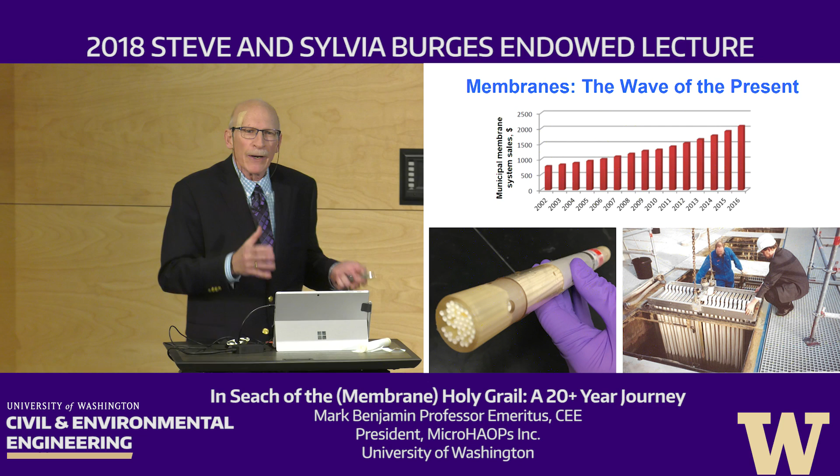The dirty water is put on the inside, and the membrane takes the contaminants away as the water is pushed through the walls of the straws. The problem is that the contaminants which you want to remove, and which the membranes do a very good job of removing, clog up the holes in the straws. So the very job of doing what the membranes are supposed to do causes them to fail. That failure is called membrane fouling.

This is water we've used for many years in our testing, from a local lake that's fairly severely impacted. It's dirtier water than most drinking water supplies would be. We used it so we could do our experiments faster, to be frank about it. But the general kinds of contaminants in this water, primarily stuff called natural organic matter, is the major foulant of drinking water membranes.

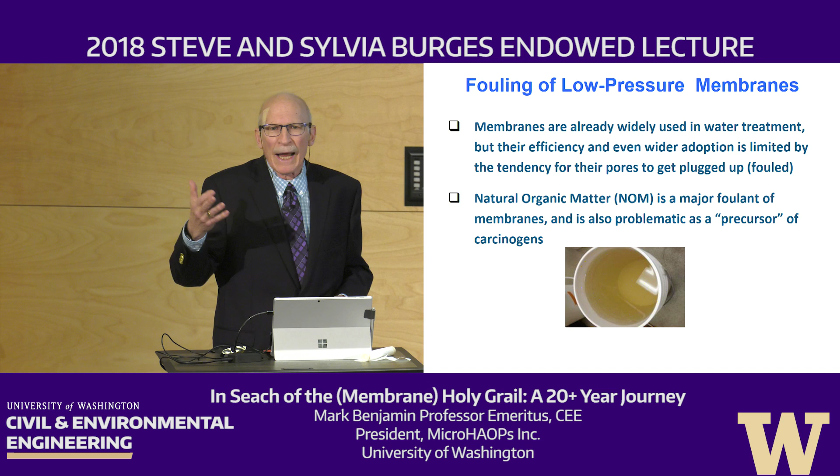Membranes are already widely used in water treatment, but their efficiency and even wider application is being limited by fouling, and natural organic matter is a major foulant. Not only is it a major foulant, but natural organic matter also reacts in traditional water treatment plants to form chloroform and other carcinogenic compounds. So you want to get the organic matter out of the water, and membranes do an okay job of that, at least some do, but you want to do it without causing the membranes to get fouled.

Here are the membranes we actually used in our testing, at least what we started with. We use much smaller, open membranes for two reasons: one, so we don't have to truck tons of water into the lab, and second, so we can see what happens. This white circle is a membrane in a cartridge. We push water through from top to bottom. The membrane collects the contaminants and also gets fouled, and we measure that fouling, which I'll show you later.

This is a different kind of membrane, one that's sold to the military and to outdoor enthusiasts taking trips into the outback. You can use this to filter drinking water if you're at a place where you're taking water from a natural stream that might be contaminated. These are the small things we use in the lab, and I'll talk about those as well as some of the larger systems we study during the rest of the talk.

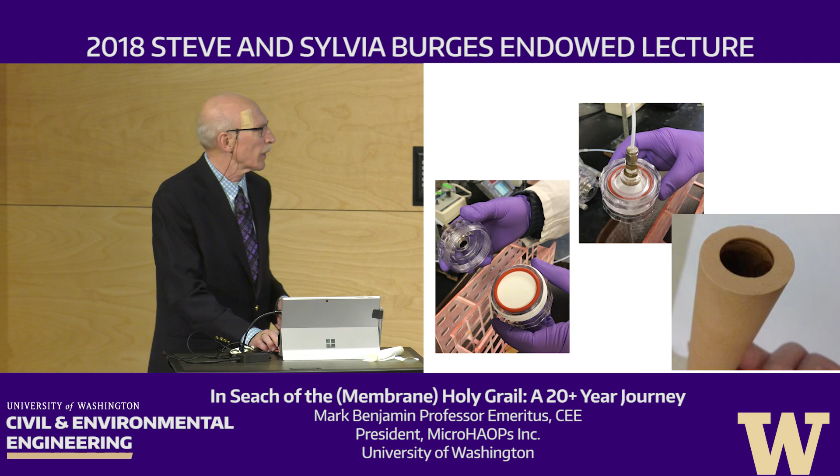Now here's what happens during fouling. Here again is the same water. This is a clean membrane, and these are pictures of the membrane after some water has passed through. This occurs over the course of a few hours, and you can see the membrane gets discolored, and that discoloration also plugs up the pores.

This is a higher magnification image of the same membrane. We didn't get a good image here, but this is the clean membrane, and you can see all the little holes in it. These holes are just a few nanometers in diameter, so very, very tiny—you can't see them with the naked eye, but with a scanning electron micrograph you can. After 1 hour, many of the holes are partially plugged. After 2 hours, most of them are plugged. And after 4 hours, they look completely plugged.

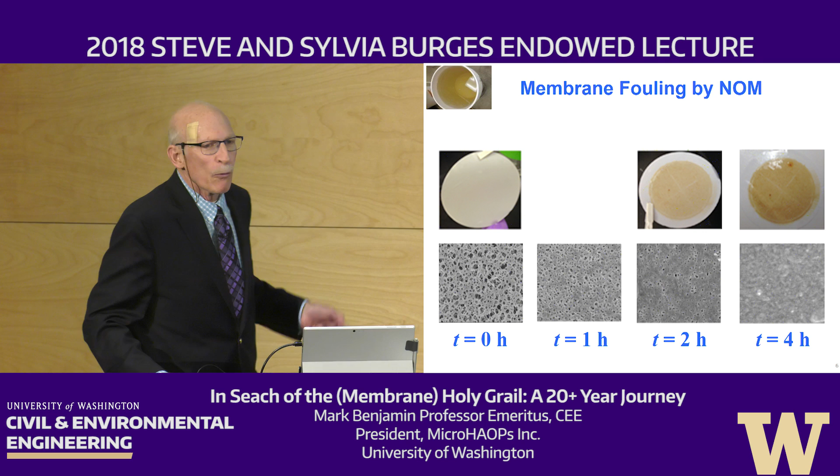Now, the other thing about this is that these particular membranes, which are really used in water treatment, do not collect very much of the NOM. So even though they foul very badly, they're doing that by removing less than 3% of the natural organic matter from the feed. So it's a lose-lose situation. You're not getting very much of this stuff out when you want to get it out, and the little bit that you are getting out is causing problems.

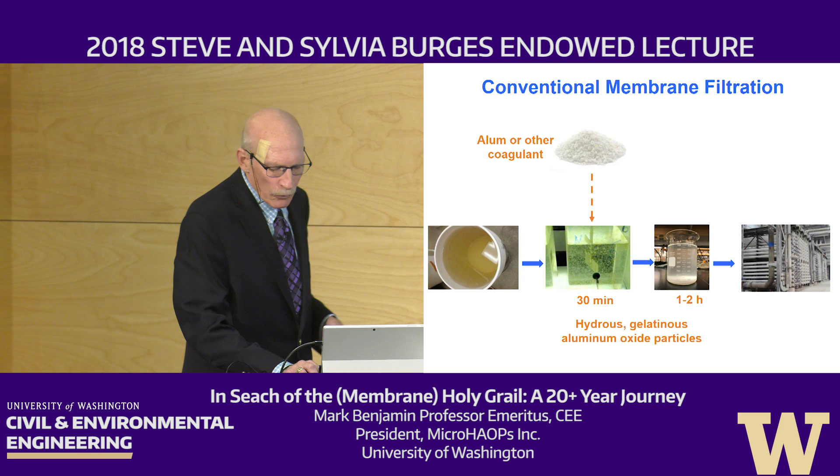Well, so there's two problems now with this conventional treatment. Again, here's the membrane plant. This shows the pressure. This is a measure of the resistance. The higher the resistance, the higher pressure you need in order to push the water through. So what happens is that, and this is, by the way, made-up data, just for illustration. But what we see is that when the membrane is first used for clean water, there's maybe a pressure of 2 to 3 pounds per square inch. And over the course of the next 40 minutes, the pressure builds up because of the accumulation of material.

Well, I said that the NOM has been taken out, so what's causing this? Well, it's a combination of the residual NOM and the particles that didn't settle. So now the particles are acting as the foulant along with the NOM. And you can ask yourself, well, if you're just taking one foulant out and putting another one in, what's the point of this? The point is that when the aluminum oxide and the organic matter are mixed together, those particles that get in there...

...even though they do cause fouling, they're much easier to wash off. And so when you wash them off, the pressure drops back down close to the original, and then you go through the same thing over and over and over, and you don't get all of them out, and so the pressure does gradually build up over time, but nevertheless, it's an improvement over the operation if you don't have the pre-treatment, the treatment with the chemical, okay?

And then after a while, the buildup is too severe and you have to do a more extensive cleaning, and that's what allows you to come back down almost to the original pressure, and then the whole cycle is repeated. I've shown this. This is a real representation of what happens, but it's very compressed.

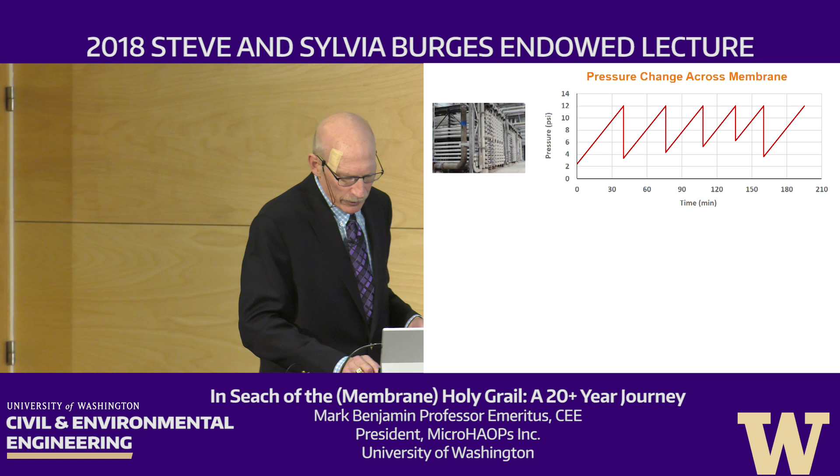Now there's another problem, aside from the fact that the aluminum causes fouling: here's the settled stuff. When this settles, you still have to dispose of it. You get a water treatment sludge that you have to get rid of, taken to a landfill. That turns out to be quite a pain, because that sludge is very hydrous. The aluminum absorbs a lot of water, and it's really hard to get that water out.

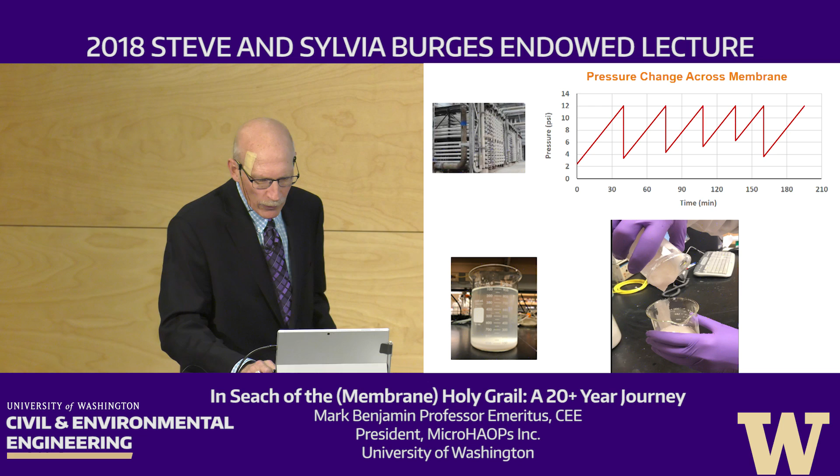So we want to overcome those problems. All right, so an overview of what the problem is and where we're at.

You can treat drinking water directly by membranes. You don't remove very much NOM, which you'd like to remove, and you get rapid fouling, some of which is irreversible because you can't get the contaminant off of the membrane, and you need to clean it frequently.

If you go to conventional membrane treatment with alum, the alum will collect some of the NOM and remove it, and it mitigates fouling by the NOM. But the alum becomes a foulant, and frequent backwashing is still required, and it generates a thick and problematic sludge.

So our goal in our research was to develop a material and a process that would do three things: remove at least as much NOM as the conventional process does, dramatically reduce fouling and backwashing requirements, and generate a sludge that's easier to handle and cheaper to process.

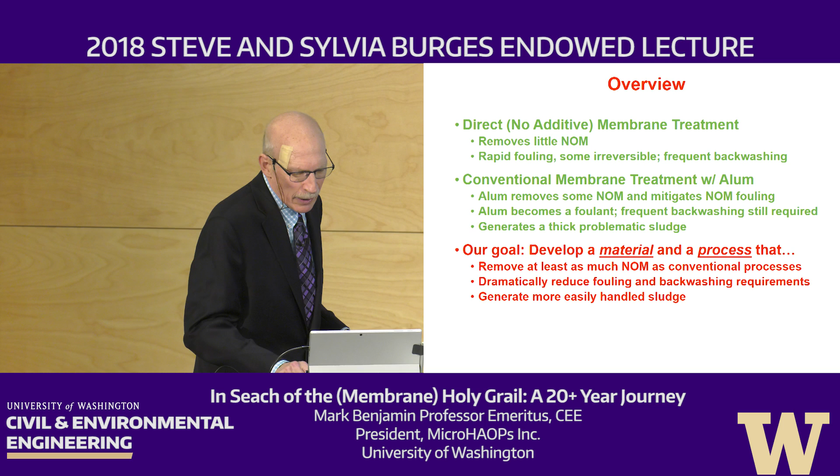So here's what we did. We first started with those conventional particles. We take alum and just add it to water, and we get exactly the same hydrous particles that I mentioned earlier. But then we decided to heat this water, with the idea being that if we heat it, we could drive the water out of the particles.

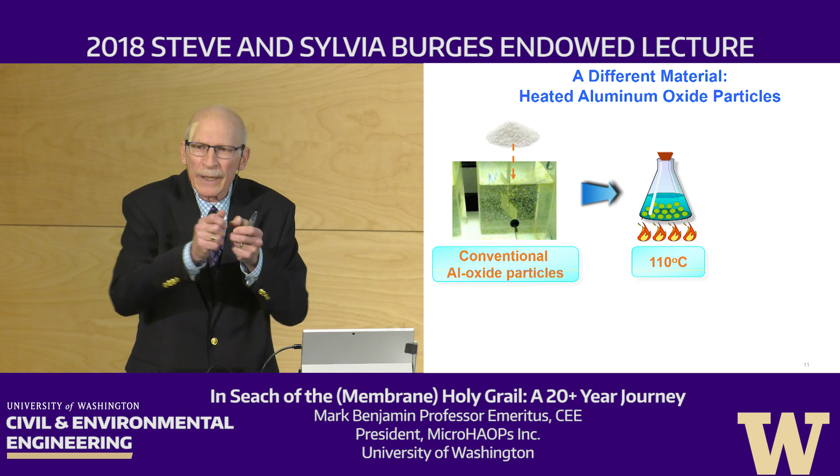Instead of being these gel-like particles, the water would get squeezed out by the heat, and the particles would have different properties. We call those, very creatively, HAOPs—heated aluminum oxide particles. We're very proud of that.

Now, what do these particles have that's important? They have a particle size that's small, that's important to us, but I don't want to go into detail. The main thing is that they do become small, and they're like tiny, tiny pieces of sand, okay? Which is very different from the material we started with.

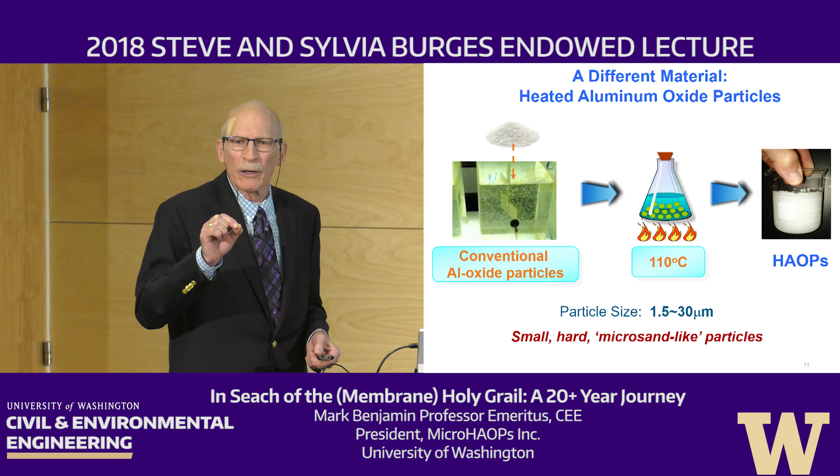And what does that do for us? Well, our hope was that if we compare the alum floc, which is gelatinous, with the HAOPs, which are more like microsand, this is what would happen when you apply them to a membrane.

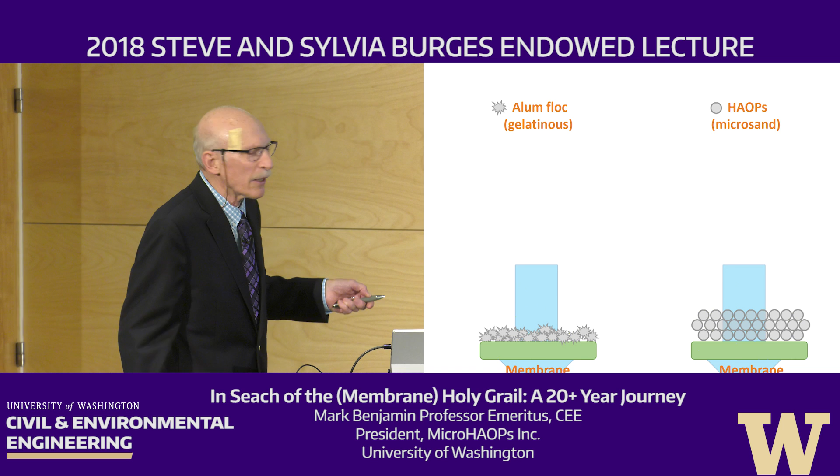The gelatinous particles, we know, come down here and form a jello-like layer on the membrane, which is very hard to drain. Whereas our particles would form layers like sand, with openings between them that would not be compressed, so the water could easily flow between these particles and not get hung up in the sludge.

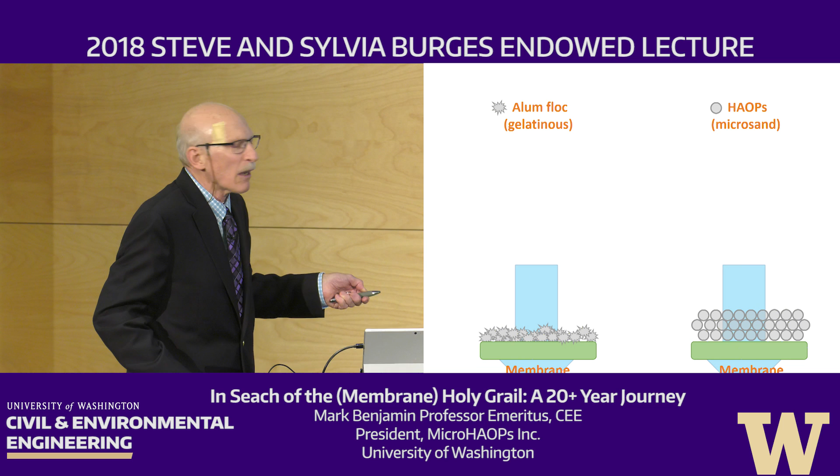So the next thing we did was ask, well, what if our particles don't collect NOM anymore? So we tried it, and honestly, this was pure luck, but it was good luck for once—we found that the HAOPs actually absorb more NOM than these conventional alternatives.

Here's alum, but here are the two other things most often used: an iron compound and activated carbon. Although activated carbon does collect more organic material than HAOPs at these high doses, this is the dose range where you want to be. Under those conditions, we found that actually heating the particles made them better at collecting the organic matter.

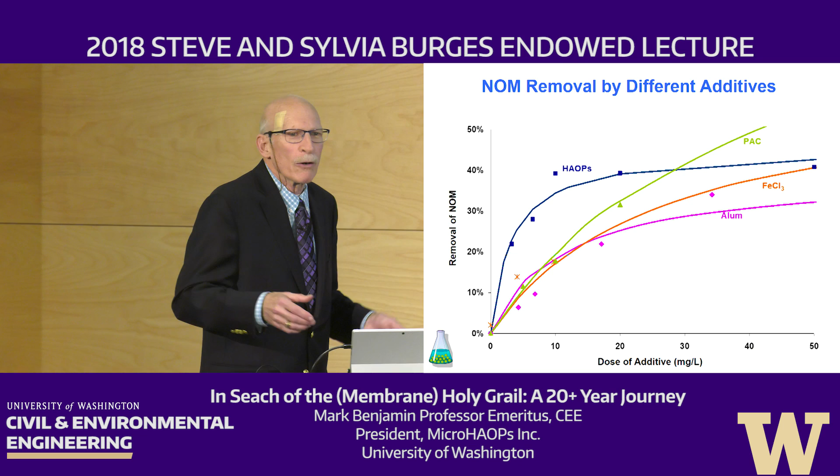That has two advantages. One is that the water gets exposed to a higher concentration of particles. Even though we're using the same amount of particles, we're putting it all in at once, and we can do that because it doesn't plug the membrane. Secondly, we can shorten the contact time, because when this flows through, it's going through a layer of particles that's like sand, and the organic matter is right up against the sand. It has to pass through the sand, so it's in very close contact with the removing agent, and we don't have to mix everything together and wait for the particles to find the NOM.

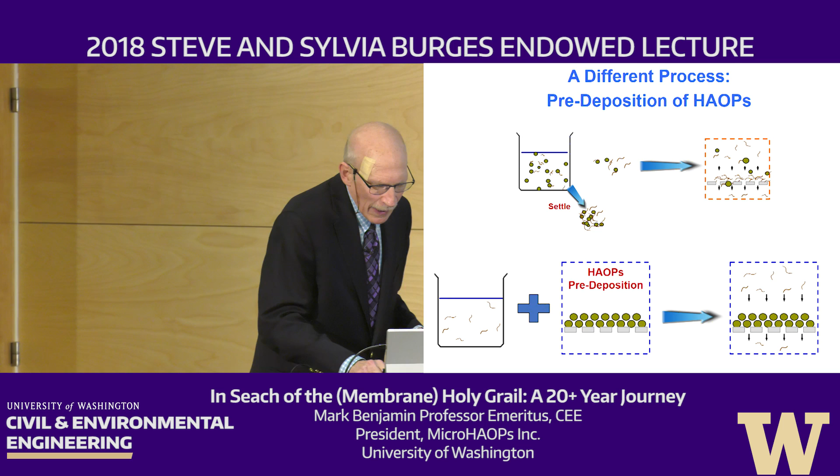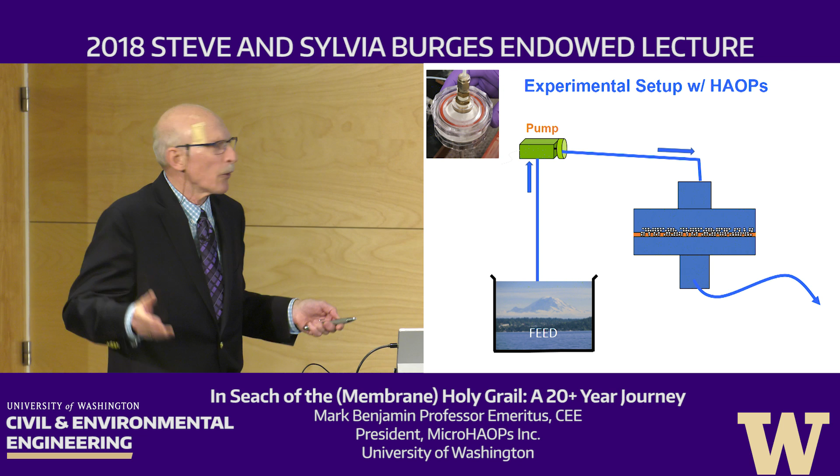So we did that, and here's how we did it. We took the HAOPs and applied them. Here's our little cartridge, and here's the cartoon version of it. We applied the HAOPs to the cartridge and made a layer on the membrane. Then we took water from Lake Washington and passed it through that. The first step, the deposition of HAOPs, takes just a minute or so, and then we can do this for a few hours and see what happens.

And on top of that, the resistance to flow through here remains relatively low because of the separation of the particles.

The next slide shows this resistance again, where we're looking at the pressure needed to push the water through, but now we're pushing it through both the layer of HAOPs and the membrane. This is the volume treated per unit area of membrane, which again is roughly an indicator of time of the experiment.

We did it three ways. First, just like the upper images on the previous diagram, where we applied the water directly to the membranes with no chemical dosing, and the resistance built up very quickly. That's this curve - over maybe a half an hour or so that this pressure built up that much.

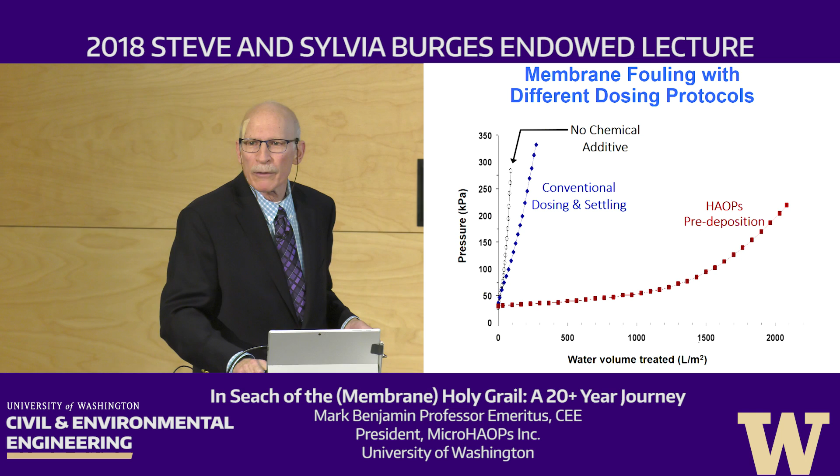So here's an interim summary. This is after, I don't know, 5 to 10 years of research. We found that membrane fouling can be severe despite removing only a tiny amount of the NOM - 3, 5, sometimes 10%. HAOPs are excellent collectors of organic matter, at least as good as the gelatinous aluminum oxide. And HAOPs layers are incompressible, and therefore hydraulically conductive, which is another good feature.

Predeposition of HAOPs protects membranes from fouling much more effectively than conventional processes do.

This is all well and good, but we haven't tested one other thing: a successful process requires that the HAOPs be deposited, and then eventually thrown out, just like the aluminum oxide from a conventional process. Those particles get clogged up with organic matter and have to be removed from the membrane, and a new layer put down.

So the question is, can those HAOPs that have been deposited and collecting all that organic stuff be easily washed off and a new layer put on, over and over again for years, without fouling the membrane?

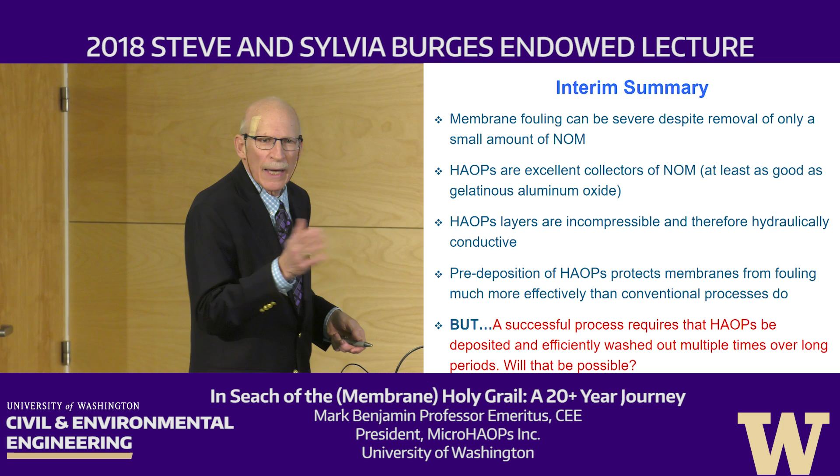To do that, we had to design a system that was easy to use to clean out the HAOPs after we were done. We couldn't do it with those little membranes because they have the consistency of sheets of paper—you can't pass water quickly through them to wash off the HAOPs, they'll just tear apart. So we moved to a different kind of membrane, the one I showed you earlier that's used by hikers.

We put that in a column and did the same 3 experiments. In the first, we just took lake water and passed it through this membrane. The water goes through, gets collected so we can determine how much NOM was removed, and we keep track of how hard it is to push the water through. That's the baseline case, the control for a system with no chemical treatment.

Then we did 2 other experiments with more conventional treatment. Rather than feeding the water directly to the membrane, we first added either alum or HAOPS, two separate times—once with alum to simulate a standard process, and once with HAOPS added directly the way alum is added, to see how that works. After doing that, we measured and recorded the pressure required in those 3 cases.

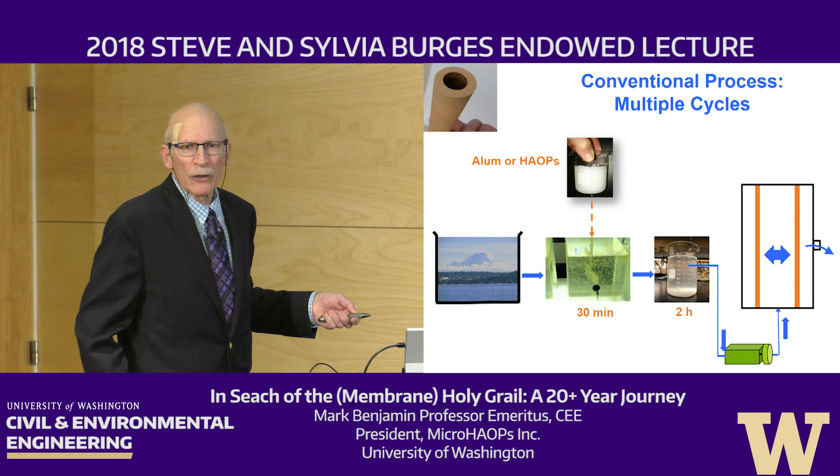In the control case, with no alum or HAOPS added, the pressure built up like this, over the course of several hours. At the end of each step—after 2 hours of filtration—we pushed water back through the system from the inside. That broke the HAOPS off the surface of the membrane and flushed them out, and then we put a new layer on. We did that every 2 hours, cleaning the membrane, and that's what these data points represent.

This is the pressure at the beginning of the next step after using the membrane for 2 hours and then cleaning it. What we see is that the addition of either alum or HAOPS does a good job of improving performance compared to not adding them, and that HAOPS and alum perform about equally well. One can argue HAOPS is a little better here because it took a bit longer for the pressure to build up, but it built up anyway.

Now remember, this is not the process we want to use—this is where we used HAOPS the way alum is used. Then we did the experiment we actually wanted: instead of adding the HAOPS or alum to the water, mixing for 30 minutes, settling for 2 hours, and then applying to the membrane, we first put the HAOPS directly on the surface of the membrane using our stock solution, pushing it through. As the water is pushed through, the membrane collects the HAOPS and a layer forms, just like before. That only took 10 minutes.

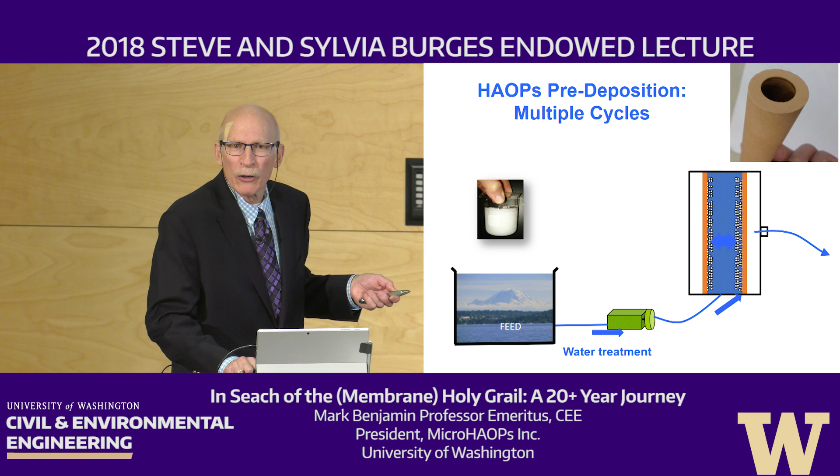Then we fed water from the lake through this, and to get out, it had to go up through the HAOPS layer to reach the membrane. Here's what the 3 curves looked like before, for the conventional treatment, and here's what it looked like when we did it this new way. This time, we didn't clean that membrane every 2 hours.

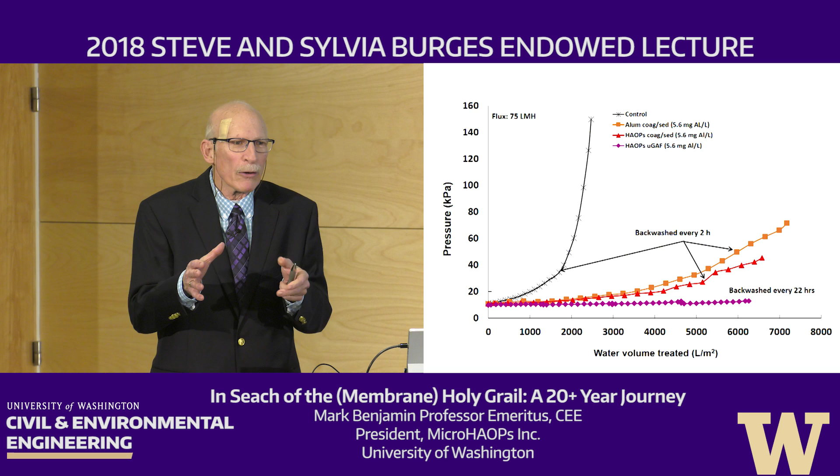We cleaned it basically once a day, every 22 hours. Over the course of 3 days, there was effectively no fouling and no buildup of pressure. In other words, we can use our HAOPS now to do the same job that conventional treatment accomplishes, with much less fouling and a much shorter treatment time, only taking 10 minutes for the HAOPS to be deposited as opposed to a couple of hours for the water to be treated. And we can do this with very little pressure buildup over days.

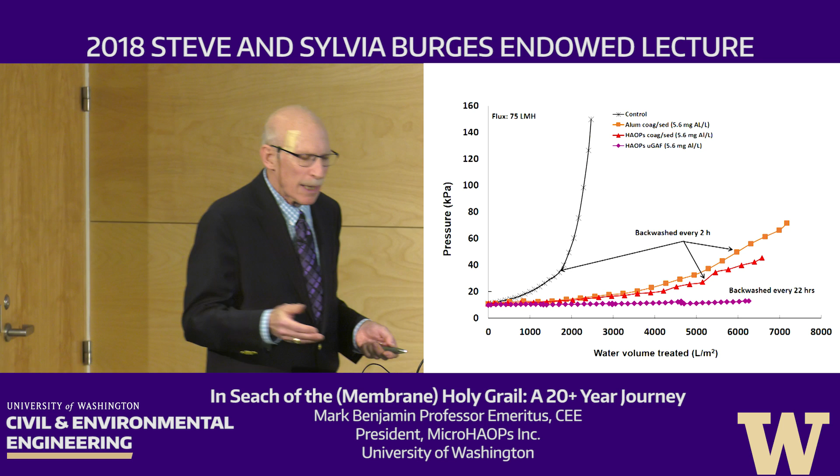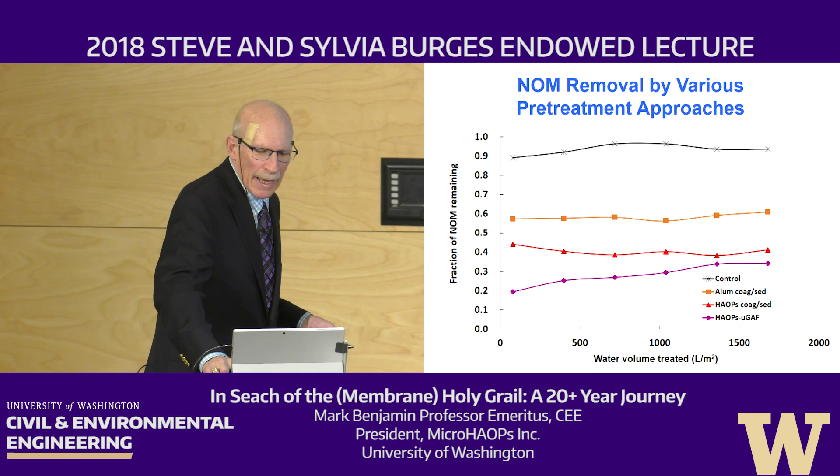Remember, there were 3 goals. One was to remove NOM. Second was to reduce the pressure buildup, or the fouling. The third was to get a sludge that was easier to dewater, to get the water out of.

So we took this stuff and passed it through a filter, or applied the mixture to a filter, to see how hard it would be to get the water out of it. And we got a nice little muffin. Water just drained right through this stuff. It was amazing.

This turns out — and this is not what I understood at the beginning of this research — to be perhaps the biggest cost savings for a water treatment plant that our process might be able to provide. It is so expensive to dry and dispose of conventional sludge that just getting a sludge this easy to dewater may be the biggest advantage of our whole process.

So at that point we asked ourselves: let's step back and think about what the HAOPs do in this process, and what the membrane does. Well, the HAOPs layer removes the NOM and mitigates fouling. That's great. The membrane itself is basically just holding the HAOPs in place, and it also removes very small particles that sneak by the HAOPs, because the spaces between the HAOPs are bigger than the holes in the membrane.

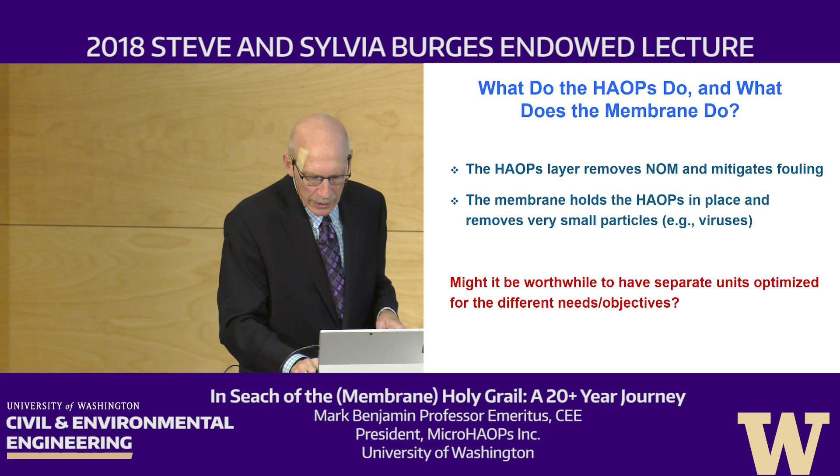So we asked ourselves: does it really make sense to use the membranes to hold the HAOPs? Maybe we can be better off by separating the units and optimizing each part for its own application. With help from some industrial partners downtown, we came up with this idea.

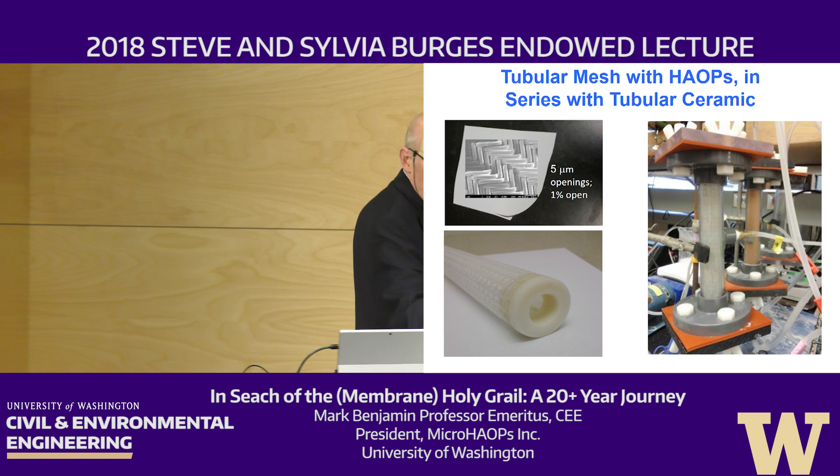We took a mesh — I have it here. It's like a piece of fabric, still about the thickness of a sheet of paper. It's good and strong, and it has openings about 5 microns, small enough to capture the HAOPs. And we put that on a backing, a plastic webbing, that we rolled into a tube.

This didn't have any of the webbing in the flat sheet, but we took this, placed it on the webbing, and then rolled the webbing to make a tube. So now we have this stuff in tubular form, with the webbing providing the structural support for it. We figured that will capture the HAOPs, and then we can take the water that comes out of that and apply it to the membrane, so there's going to be no HAOPs directly in the membrane.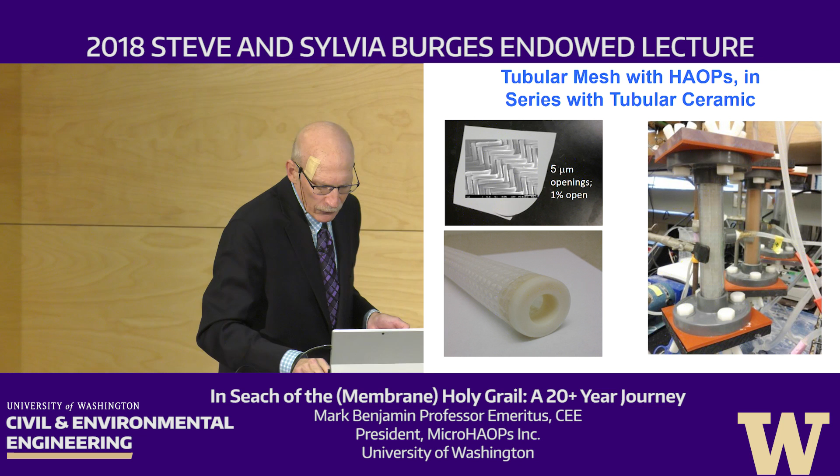So here's the real system. This is the tube I just showed you. The water is going to come in this tube. We're going to put the HAOPs on this tube. The water is going to come through here, go through the HAOPs, through the mesh, and then go into this ceramic membrane.

Okay, here's the cartoon again, you're used to seeing this now. Here's the system in reality, here are the HAOPs. We first take the HAOPs, we apply them just to the mesh, and the water that comes out we just throw out. This again takes 10 minutes or less. Then we take water from the lake, we pass that through the mesh and the HAOPs, and then apply it to the ceramic membrane.

And see what happens. Well, as before, the HAOPs themselves do collect NOM, and they therefore do get a little bit plugged up.

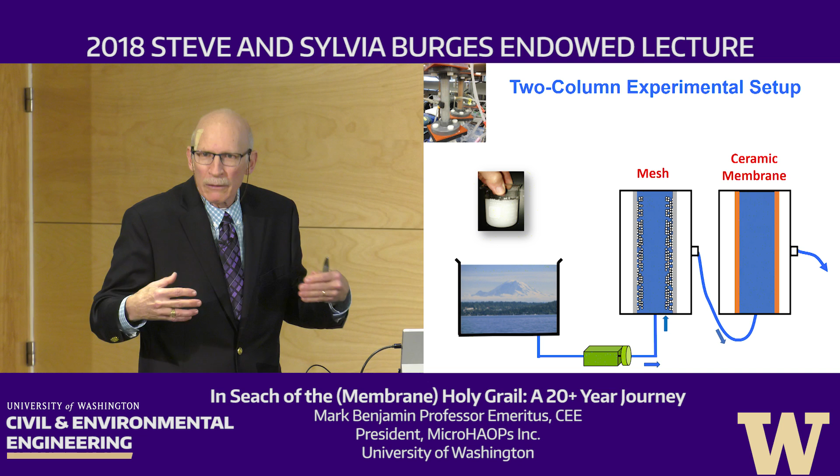This shows about 10 days of operation, with this unit being cleaned about once or twice a day. Each day the pressure builds up a little bit, then we clean it, and it comes down again. Then it builds up a little bit the next day and we clean it. So we have 10 days of cycles where the pressure, in order to force the water through this system, is building up on the mesh, and then we clean the mesh and it doesn't have any HAOPs. We put a new layer of HAOPs on and start again, and that works fine.

So this shows a pretty good consistency, and the pressures here to push through the mesh are actually lower than what we had for the membrane, because the openings in the mesh are bigger.

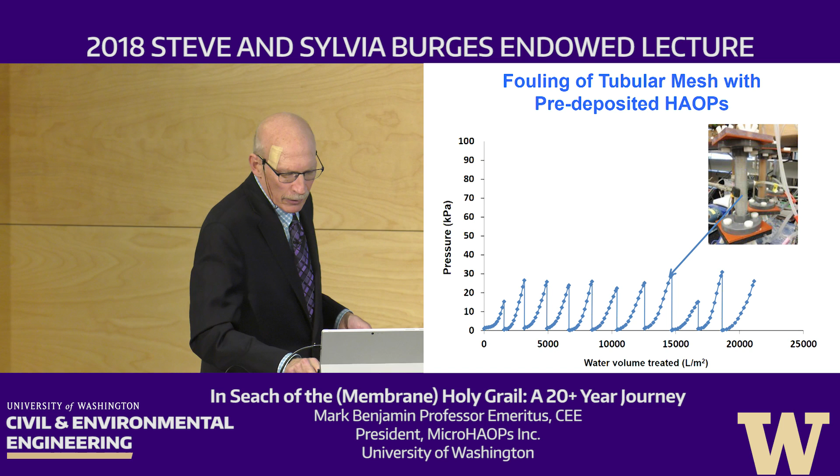Then comes the more amazing part. During this whole time, we cleaned this mesh once to twice a day, but we never cleaned this membrane at all. We just took the water out of here, and 24/7 we passed it through this ceramic membrane. Most of the fouling material has been removed here, so look what happened - the pressure buildup on that ceramic membrane was essentially zero.

I'll tell you two brief stories about this. I showed this to the funding agency, the Office of Naval Research, and the guy who was in charge of providing the funding said, wait a minute, let me get this straight. You did this for 10 days without ever cleaning that membrane, and you didn't see any pressure buildup? I said, that's right. And he said, for 10 days? I said, yeah. Without any pressure buildup? Yeah. And no cleaning? I can't believe it, all right?

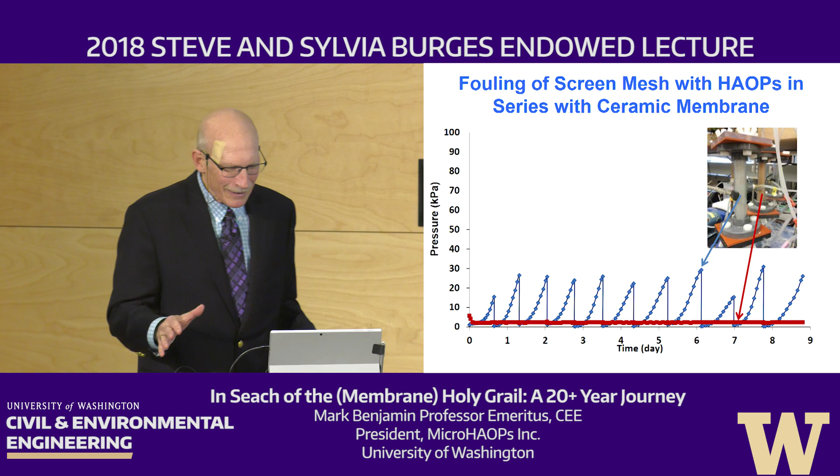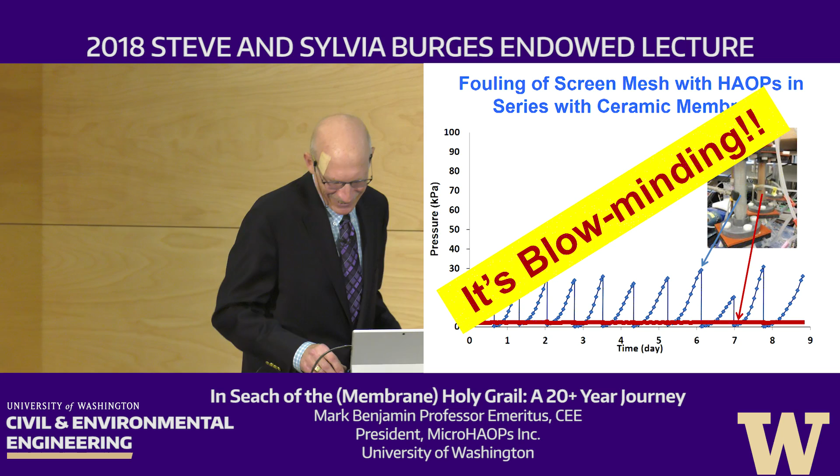But he wasn't even the best. The best one was a Polish postdoc I had working with me at the time who loved American colloquialisms. And she usually got them right, she usually did, but sometimes she didn't. And she came to me and she said, this result, it's amazing, it's astonishing, it's blow-minding. So I love that expression.

All right, so where are we now? We have minded our blows, or blowed our minds, or whatever. And we've gone from this scale to this scale to this separate treatment. And it's all looking good. But these were all laboratory systems that we needed to do to prove our concept and to make sure that we had something that was even worth taking to the next stage.

And we were very pleased about this, but this honestly was probably 15 years. I've skipped a lot of stuff, as you can imagine, and most of it was failures.

But I wanted to show you here a higher magnification version of the surface of this tube, because I hope you can see that these little bumps in the middle are the mesh sticking out, and all this other stuff is the webbing that's holding it. And the truth is that that webbing takes up about 25% of the surface area. And we don't want that.

Membranes are expensive, these systems can be expensive, and we don't want to block 25% of the surface area by the plastic. On top of that, the whole process of gluing the mesh to the webbing was a pain in the butt, frankly, but we can do it for this scale system. But we talked to our industrial partners, and they said they couldn't think of any decent way to manufacture this at mass scale. We just weren't going to be able to do this.

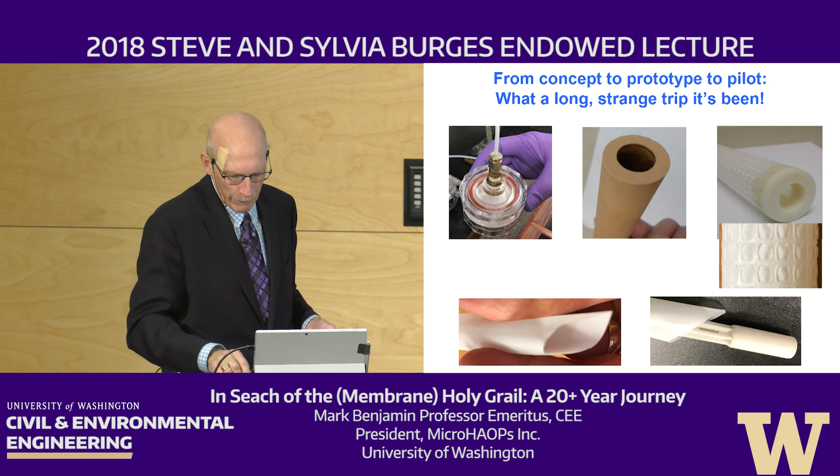Coming to the end, we got to the point where it was time to scale up and start thinking about industrial-sized processes. So we built this 6-tube module. Up until then, this was the biggest thing we had built. These tubes, we have 6 tubes in here, about 2 foot length each, so they have a good deal more water processing ability than this.

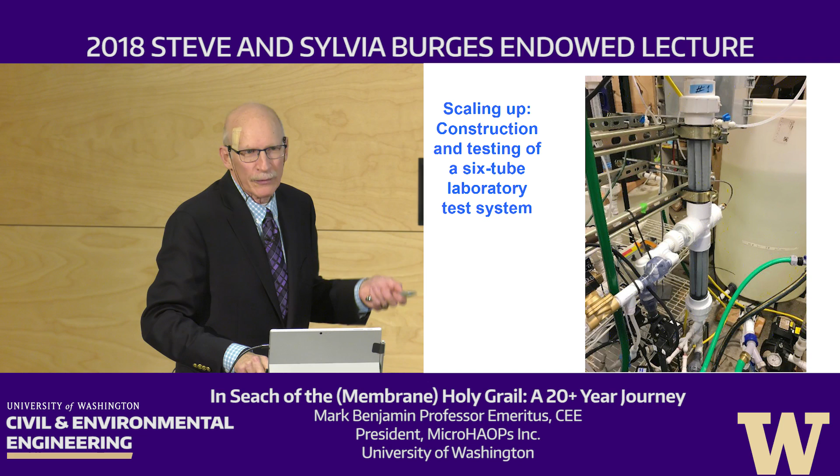We use them to treat water, and this is hot off the presses. I want to show you the result. I didn't make this up, this is yesterday's result, okay?

This is the water. This is Lake Union water. Lake Union is fairly clean, not like that dirty water we used to use to get the experiment to run quickly, but we need to process a lot of water, so our laboratory is near the lake. We set up and ran the water through there. This is the raw water in a white bucket, and this is the same amount of water when it came out. It's maybe not so impressive because this isn't so dirty, but still, we're pretty darn pleased.

That's looking good. I want to show you what the tubes look like after they spent, now this is 10 hours of treating water, and on top of exciting science and engineering, it turns out we created art. I don't know how. This is the tube at the end of 10 hours of treatment. The NOM is mostly captured.

These are the tubes, and there's a layer of HAOPs all around this, the inner surface of this tube. But at certain places, the NOM forms patterns where the color comes through. We really don't know why this is, something to do with the hydrodynamics. But it's interesting. I don't know how well you can see this.

I guess you can see it here. This is the seam of the tube, and these patterns develop right around the seam. So there's something going on there that we don't fully understand. But nevertheless, we're getting very, very good water quality, as I showed you in the previous slide.

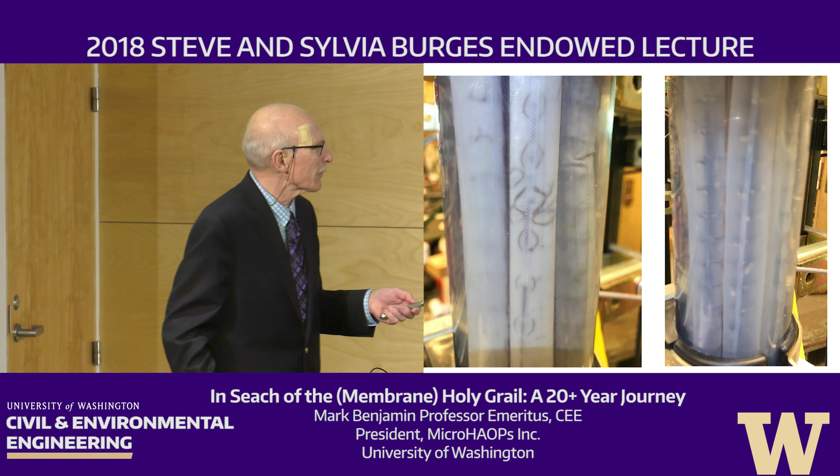We just did this experiment yesterday. We have yet to use these tubes in many multiple cycles, but we're very excited about it because these things really look as clean as when they start.

Next, we got a contract. But it wasn't because of our great work. The truth is the UW Civil Engineering Department has, thanks to an earlier benefactor, a very nice connection with people in Norway. There's a former PhD student who was here when I first came, who I got to know, who's now in a position of authority in a consulting firm in Norway. And she said, hey, this stuff you're doing is pretty cool. I have a water treatment plant where I'm wondering if you'd be willing to test it. I said, would I be? Whoa, yes! And so we built this system now with 60 tubes.

It was around here, well, now a couple years ago, that as Laura told you, I retired. As my wife Judith will tell you, I didn't exactly retire. I retired from teaching, but I have this startup along with some colleagues. And this is what I work on now, trying to get this technology commercialized.

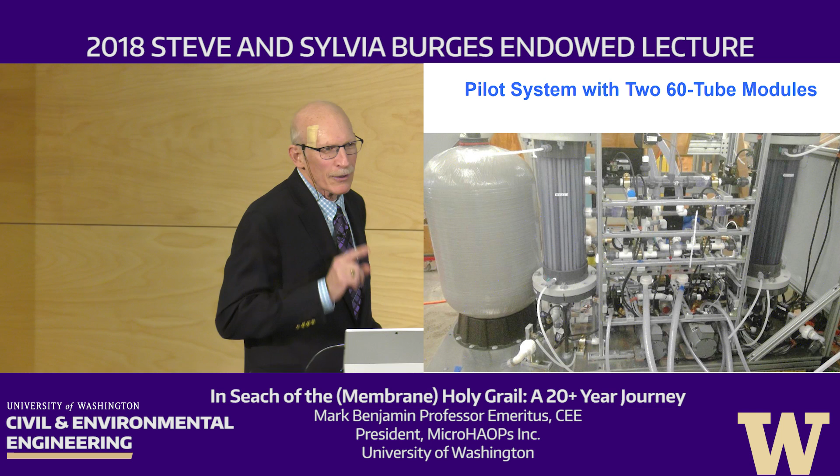The UW, to my wife's constant consternation, owns the patent on our stuff, which is how it works when you work at UW or for any large entity. The good thing is that because they own the patent, they're interested in this technology succeeding. And so a few years ago, they actually paid a business consultant to come in, talk to us, and make some projections about whether we would succeed or not. I can never say this without laughing. The consultant predicted that within 6 years, we would have revenues of $500 million.

We're doing okay. But we decided to hire our own consultants and make a projection, and sure enough, we're actually planning to exceed her projection in a year.

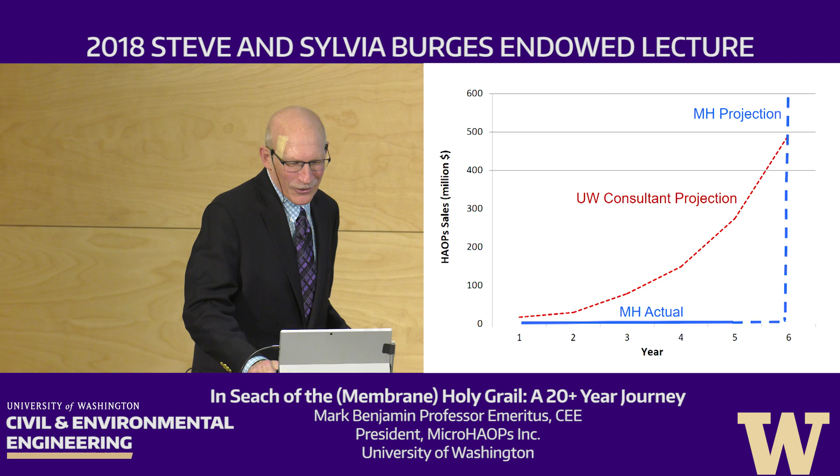So what can I say in summary? HAOPs can be pre-deposited on a porous support, I won't say a membrane anymore, even a mesh, and can collect a large fraction of the NOM from the feed with 1 to 2 backwashing steps per day. Downstream membranes can be operated at high rates with no backwashing for long periods. This is of tremendous interest to membrane professionals, saving energy because of the lower pressures and longer periods. HAOPs sludge is much easier to dewater and concentrate than conventional water treatment sludge, as I mentioned earlier, a big thing in our favor. I haven't had time, and we only have preliminary data, but it does appear that the process also works for other contaminants such as phosphorus, metals, and some other things.

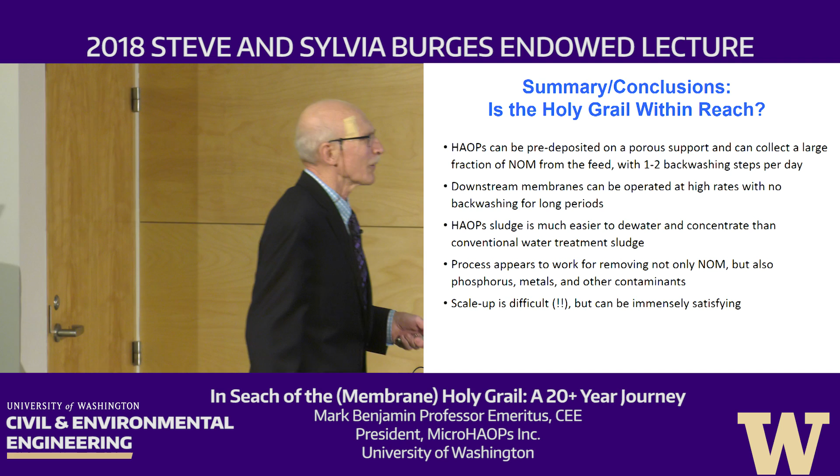One thing I've learned that I never appreciated before is that scale up is difficult, but it can be immensely satisfying.